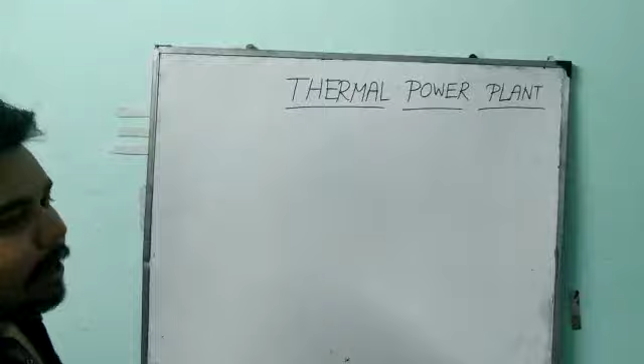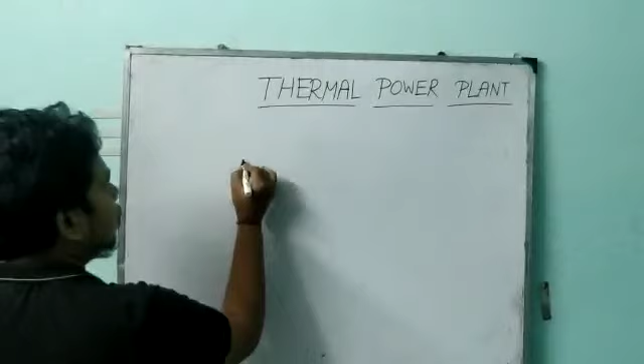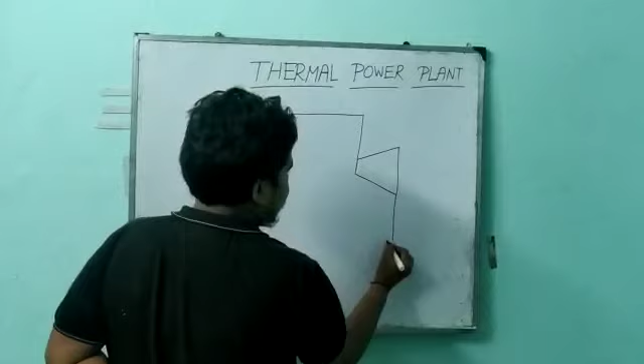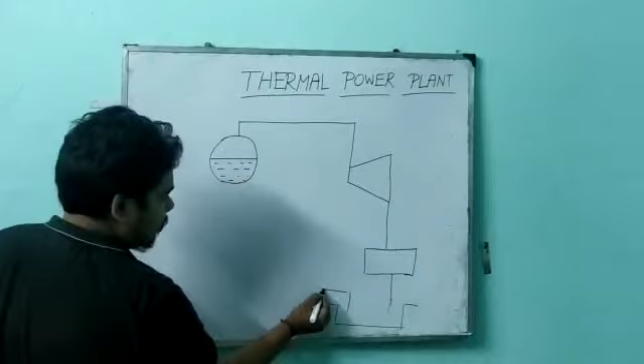I will draw a block diagram of the thermal power plant. Suppose this is the boiler, and this is the turbine, this is the condenser, and this is the feed pump.

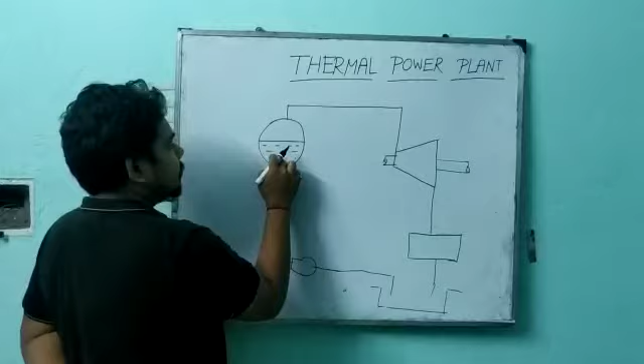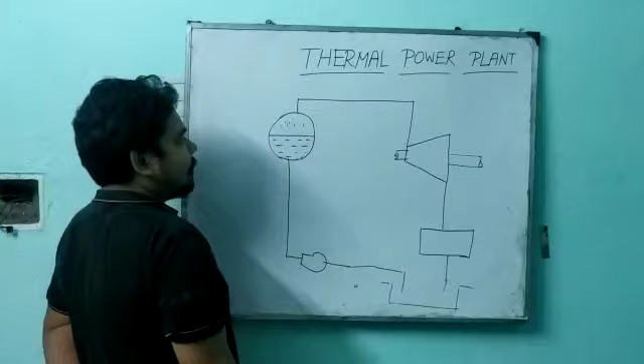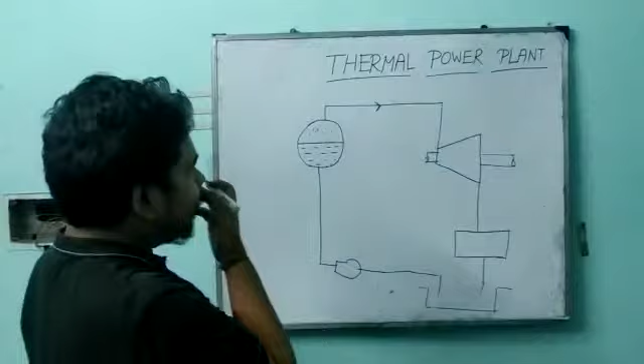Saturated steam is collected into the dome-shaped top portion. After that, this wet saturated steam passes through this line where the superheater is present. So this wet saturated steam is reheated here. After that, this wet saturated steam is converted to superheated steam.

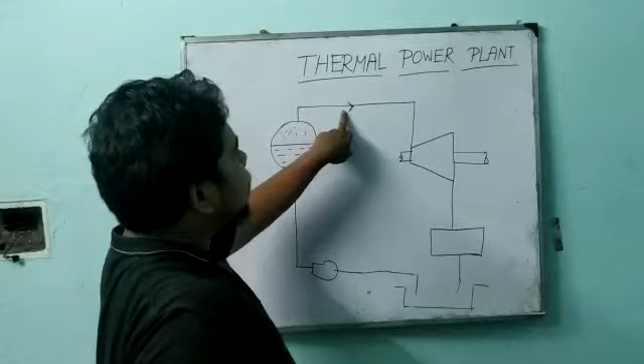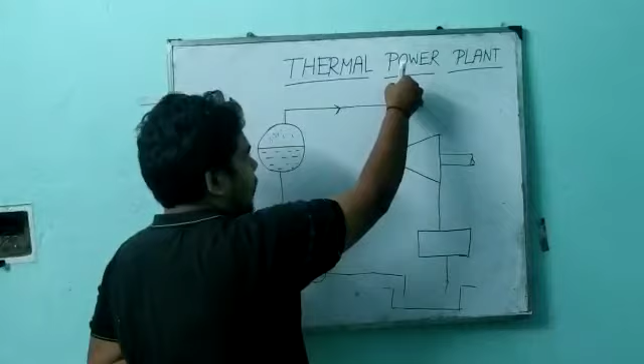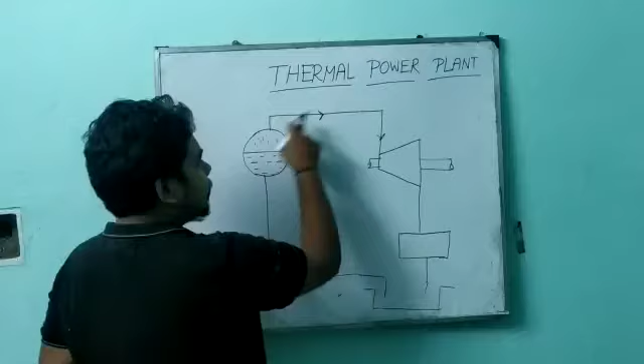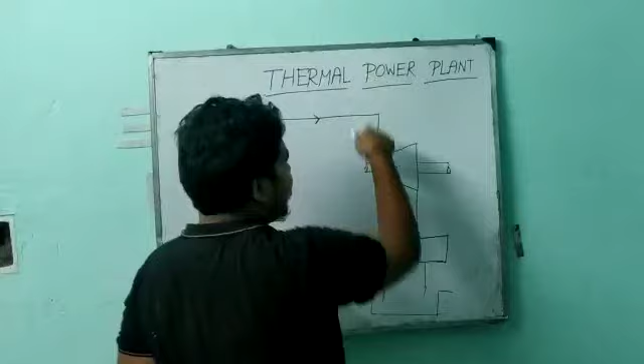After that, the superheated steam enters the turbine, and the superheated steam impinges on the turbine blades, and the turbine starts to rotate. When the turbine starts to rotate, mechanical energy is produced. So in the boiler portion, heat energy is formed, and when the steam directly impinges on the turbine blades, mechanical energy is created.

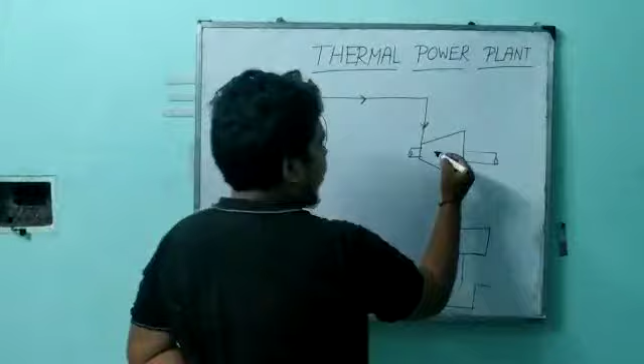When it impinges on the turbine blade, the turbine starts to rotate.

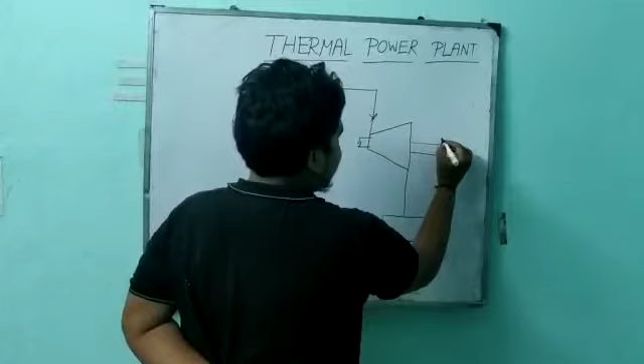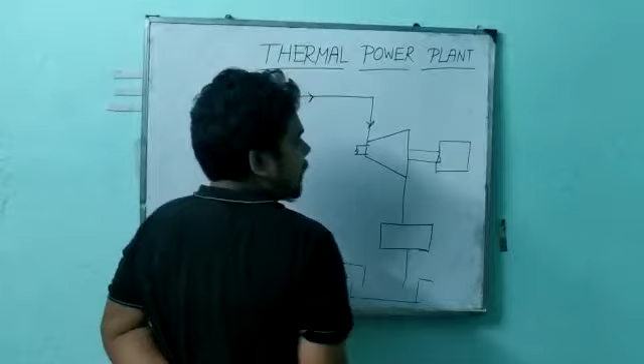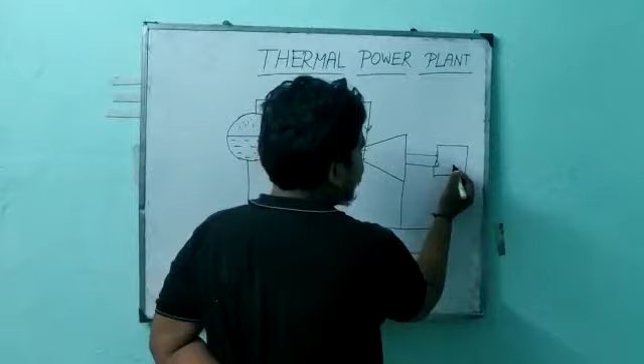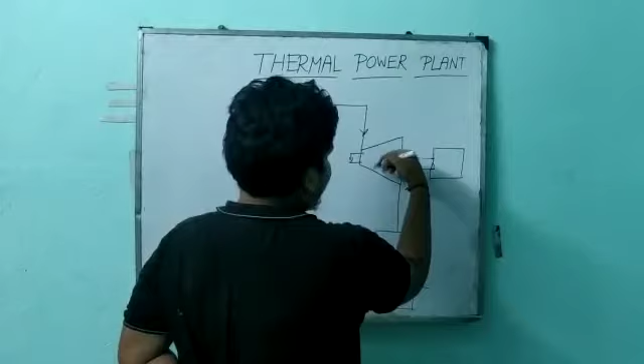When the turbine rotates, this shaft also starts to rotate, and the generator also starts to rotate. So in this portion, mechanical energy is converted to electrical energy and produces electricity. After that, the steam which is used to rotate the turbine comes into this portion, and this is called the

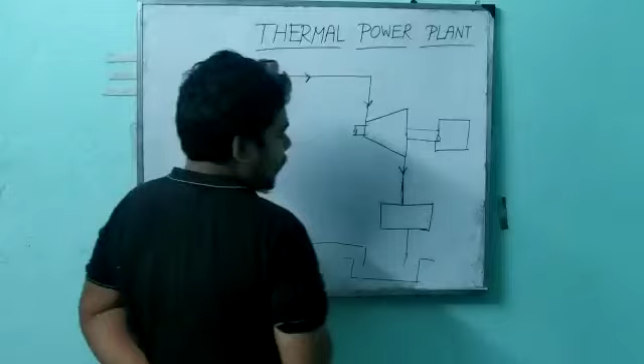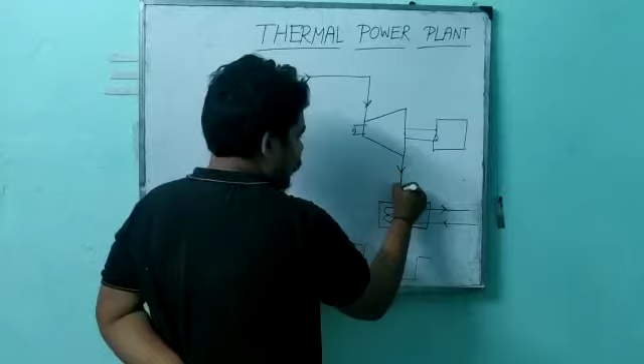exhaust steam. This exhaust steam enters the condenser, where water enters from an outward source. This is called the surface condenser. In most power plants you use the surface condenser. So in this portion the exhaust steam enters, and in this portion the cooling water passes through this way.

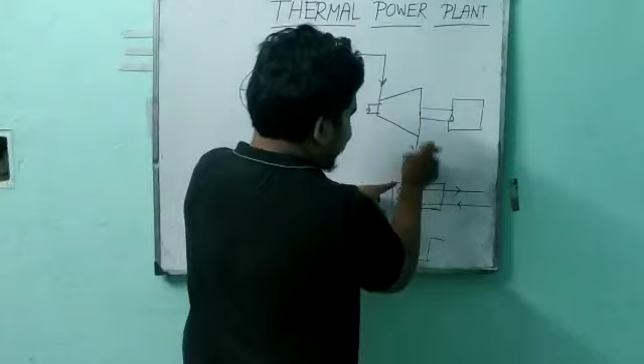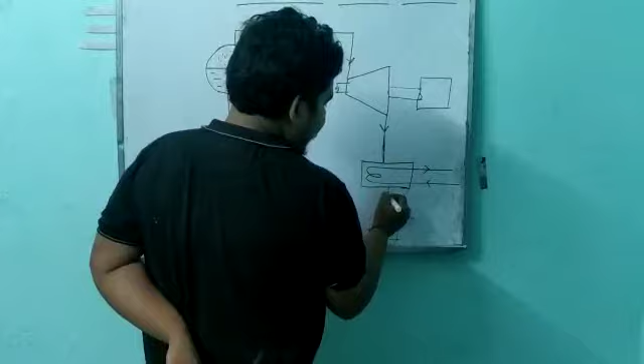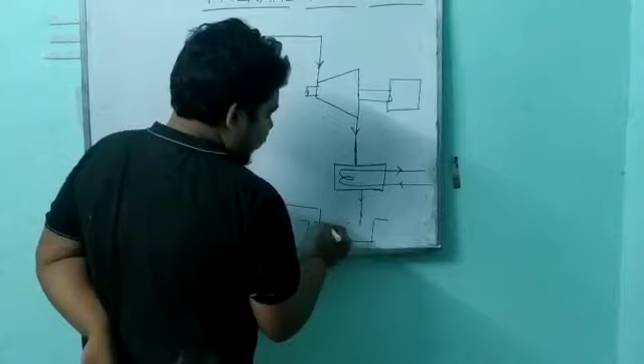The exhausted steam enters the condenser, and here it comes out, and this steam is condensed into liquid form. After that, it is collected in liquid form into the hot well.

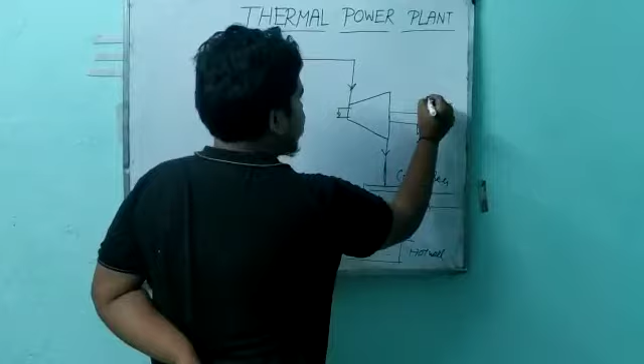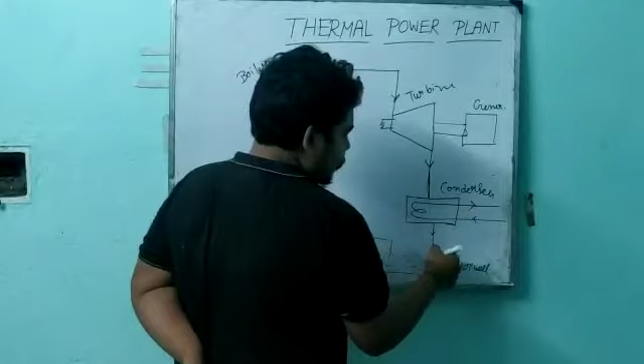This is the condenser, this is the generator, this is the turbine, and this is the boiler. After that it enters the hot well, and this is called the feed pump.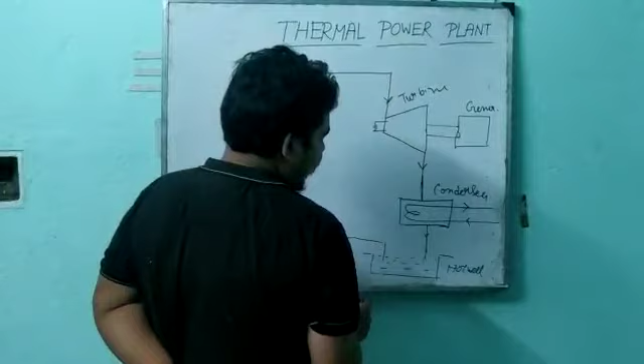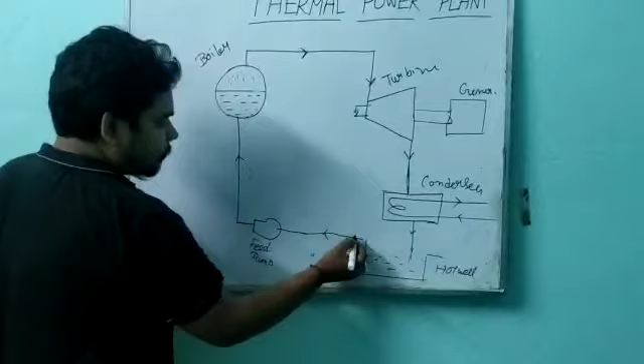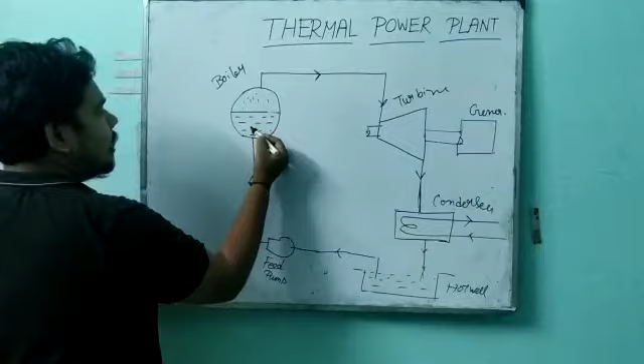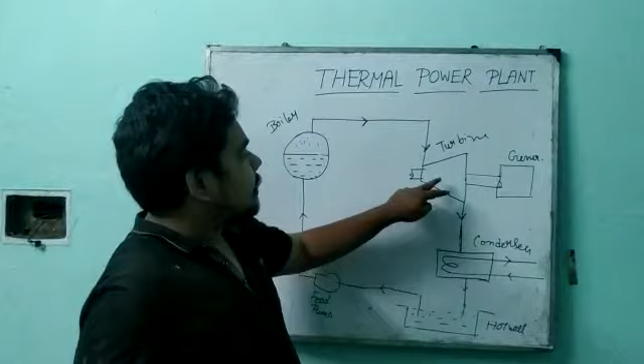After that this water passes through the feed pump and directly enters the boiler. So in this way the whole power plant runs. At first the water is heated and makes wet saturated steam, then it enters the superheater and makes superheated steam. After that it directly impinges on the turbine blade, this turbine starts to rotate, and this turbine is coupled on the same shaft with the generator.

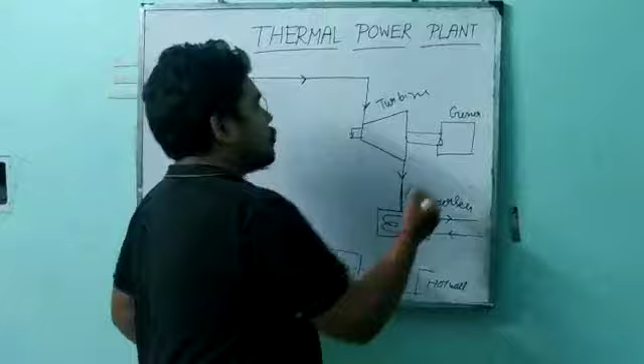When the turbine starts to rotate, this common shaft also starts to rotate, and then the generator starts to rotate. So in this way mechanical energy is converted to electrical energy, and heat energy is converted to mechanical energy. So electricity is produced, and this is the power line.

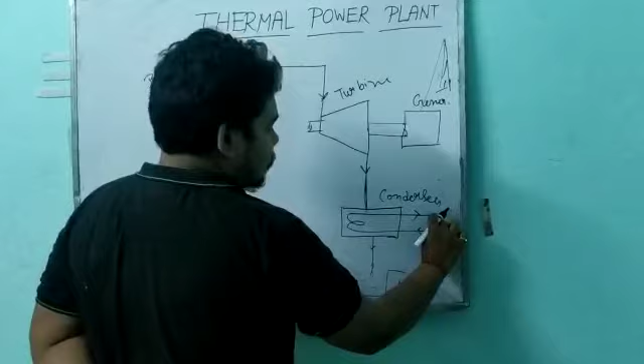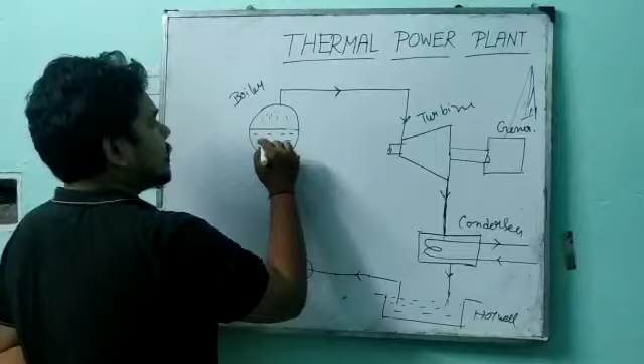After that, this exhaust steam enters the condenser, and water flows through in the outward direction. The exhaust steam comes into contact with this water, is condensed into liquid form, and is collected in the hot well. After that, through this feed pump, this water enters the boiler. In this way the thermal power plant runs and produces electricity. So this is the basic working principle of the thermal power plant.